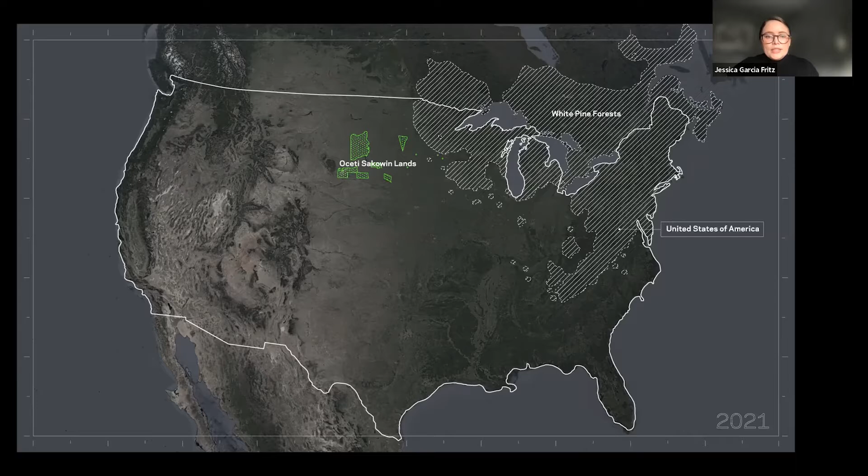At the heart of these colonial practices, which do continue today, were a series of conflicts and negotiations solidified through political agreements. And treaties comprised the original political agreements made between the United States and indigenous peoples to border land into possessed territories. From 1805 to 1868, 34 treaties were negotiated between the U.S. and Oceti-Sakowin Oyates, or nations.

Treaties became synonymous with the colonization of indigenous lands. They were also precarious and controversial, mainly because of representation and interpretation. This is why many treaties were written without full representation of a Oyate or nation present. But what was also controversial was that the language between the parties was a hindrance. English was favored, and later on, several treaties were broken.

In fact, treaty writing between the United States and indigenous nations abruptly ended with the 1871 Indian Appropriations Act. Though seemingly empty territories had already been surveyed, defined, and mostly depopulated at this time, spaces had only started to be resettled by the US. But in place of treaties, new forms of political agreements further expanded the US's control of resource extraction territories.

At the same time, the architecture and construction community in the US embarked on a structuring of agreements through organizations that governed the social, economic, and labor culture of building sites. Specification writing emerged as a practice borrowed from England, and the specification spread as an instrument of practice with the founding of the American Institute of Architects in 1857 and the subsequent professionalization of architecture in the United States.

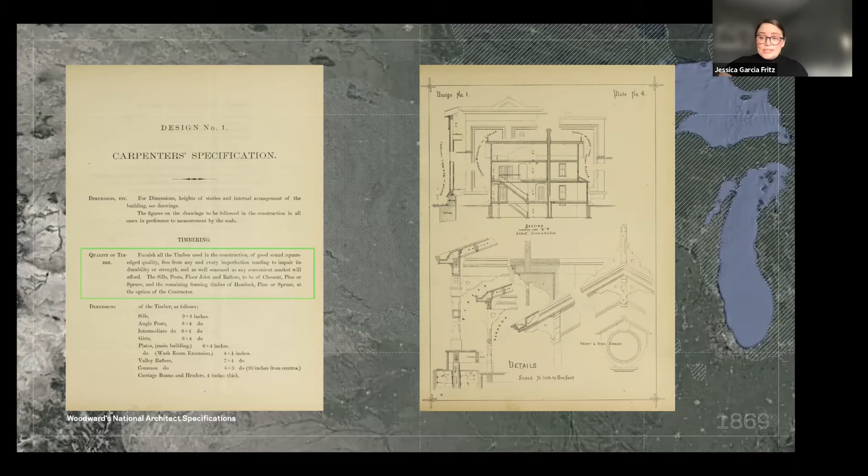Quality was interpretable, as classification systems were non-existent at this point, and the species of wood was left to the local market availability. So contractors were given agency to choose the quality and type of wood depending on their location. In spite of the generic language used for accommodating local materials, there were moments of specificity that did arise in modes of construction made possible, particularly through white pine.

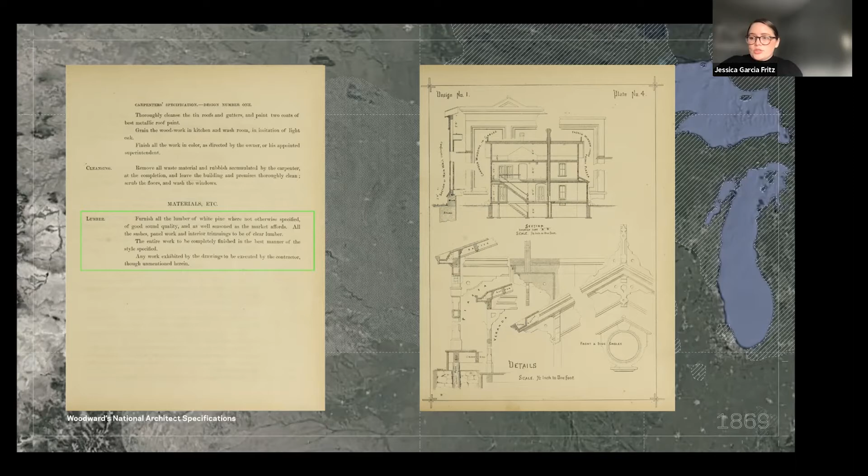So here we see that the lumber is somewhat being alluded to. It says, quote, "Furnish all the lumber of white pine where not otherwise specified," and it goes on, unquote. This material-focused directive speaks to the ubiquity of white pine as an already available construction material... treaties offered a strategy for removing indigenous peoples. Specifications aided in the resettling of indigenous lands.

U.S. legislative acts such as the 1862 Homestead Act encouraged and further enabled white settlers to claim up to 160 acres of surveyed plots if they could live and build upon them. As land was surveyed and sectioned into individual plots, U.S. citizens and immigrants flooded to the northern Great Plains to become property owners. And at this point in time, the white pine industry had its consumers.

This form of colonialism, called settler colonialism, is an ongoing form of inhabitation that seeks to replace the original population of the colonized territory with a new society of settlers. Structures like houses, which we can see here, are key to demonstrating settlement through their permanence. And pattern books with drawings and specifications like Woodward's National Architect proliferated, along with the expansion of lumber processing and shipping needed to move lumber to remote locations.

For Dakotas, Lakotas, and Nakotas, the encroachment of the white pine lumber industry reached a climax with the introduction of railroads needed to move materials. In 1868, the Fort Laramie Treaty became the final treaty written between Oceti Sakowin peoples and the United States. Before its signing, Dakotas had been pushed to western lands occupied by their Lakota and Nakota kin as a result of military conflicts that accompanied the industrial practices near the ceded lands of the first 1805 treaty we had seen earlier.

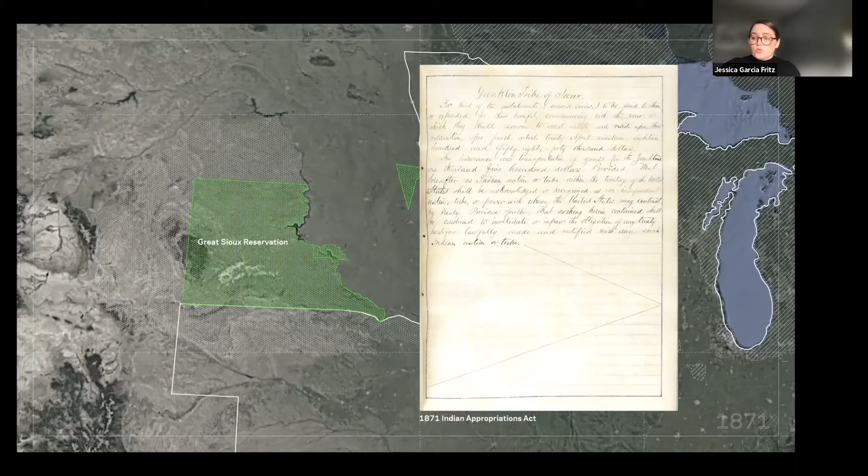With treaty making removed as a political instrument for colonizing indigenous lands, specifications helped to further delineate territories needed for resource extraction. And from the generic specifications we saw written by George E. Woodward and Edward G. Thompson for Woodward's National Architect in 1869, which was published one year after the signing of the Fort Laramie Treaty, we begin to see the evolution of white pine specification writing.

Generic specifications organized according to a housing type gave way to guides written by material producers and institutions for optimizing material selection according to lumber grades and classifications. In this way, specifications for white pine became more specific. Lumbermen's directories and reference books of the United States and Canada categorize wholesale, retail, commission dealers, and manufacturers according to locations and types of timber sought or dealt in.

So we're seeing here Rand McNally, there's a publication from 1891 and a subsequent publication from 1893. And these books offer rules for inspection, classification, measurement of lumber. They also provided state laws for lumbering. And by the end of the 19th century, Minnesota, which was an official U.S. state, dominated white pine production. So lumbering in Minnesota became synonymous with white pine.

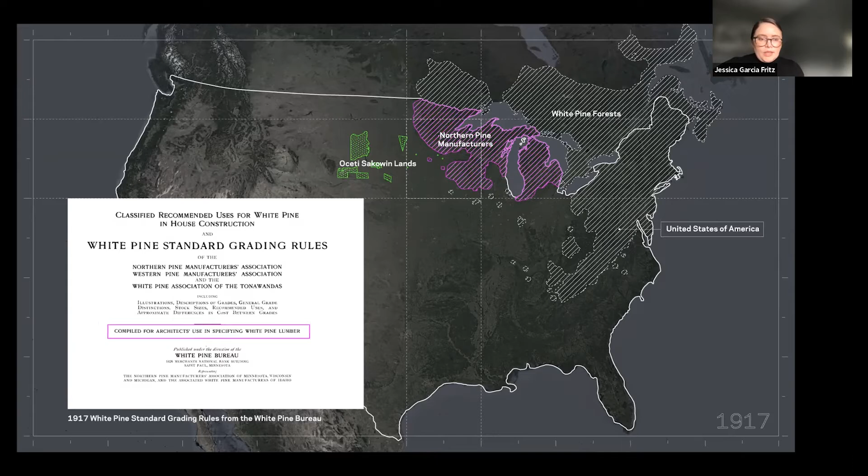But in the context of colonization, the guide that's provided here further delineated and tightened the territories in order to specify white pine elements according to class and grade. And architects were able to specify by first selecting the territory from which the lumber could be extracted. And finally, in this slide, we can see how the tightly defined territory is used in the index of the guide to point architects to the materials and elements they may select.

This is perhaps where we need to conclude. From the first white pine tree cut along the Rum River in 1818 to the material's standardized production, specifications written for white pine construction were entangled in the territorial marginalization of Oceti lands. As political agreements, treaties and specifications are both accountable for the creation of territories. Although the delineation of seemingly unsettled land is more directly linked to treaty negotiations, specifications create an initial need for territories and the raw materials they possess. And the increased selection of a certain material or a product expands territories to meet demand.

The evolution of white pine specifications from the mid-19th century to early 20th century further supports this correlation. Generic language written in pattern books such as Woodward's National Architect of 1869 indicate unknown territories for the extraction and production of lumber. In the book, directives written for houses intended to resettle newly acquired territories in the US offered substitutes in the absence of materials like white pine. But later, specifications written in the early 20th century by institutions such as the White Pine Bureau indicate a shift in precision. Size and quality of the material were meticulously considered.

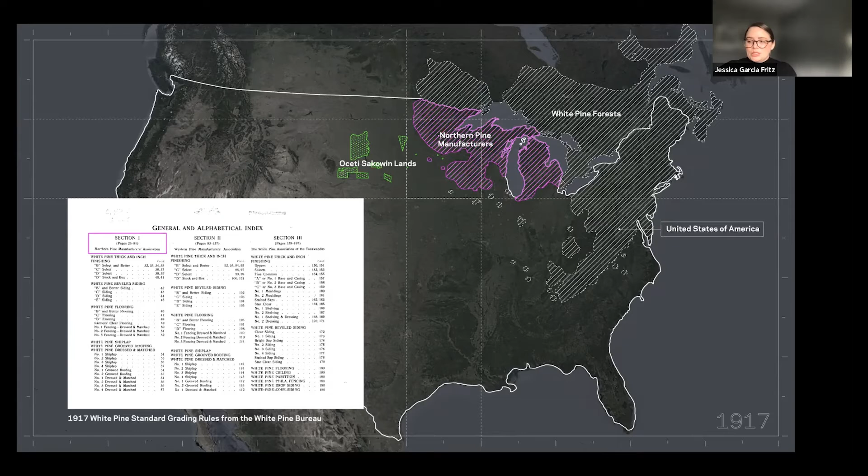As territorial borders and locations solidified, so too did points of extraction, sawmill construction for processing, railroad expansion to move the material, and military forts to defend the territories. Ultimately, precise specifications advanced specific territories. In architecture and construction, the contemporary effects of white pine extraction and its production into lumber in Oceti Sakowin lands extend beyond a simple reckoning with settler colonial practices, which, of course, are ongoing and continue. Instead, specifications must be understood as instruments for connecting seemingly benign material selection to vast territories.

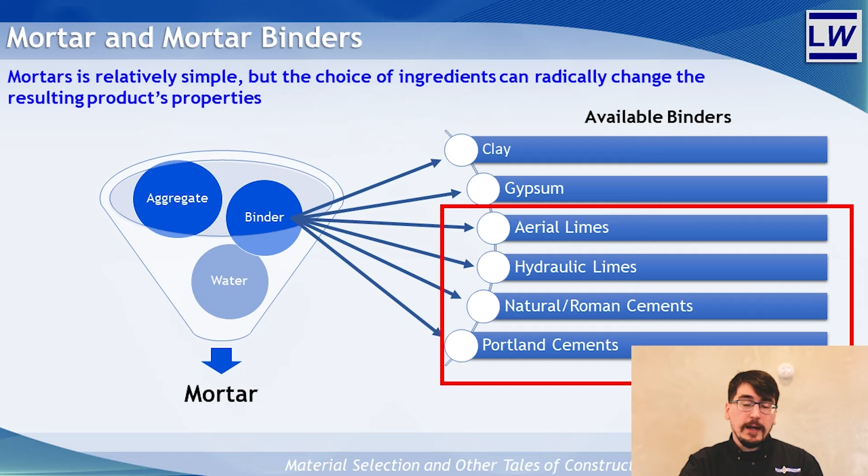For today's lecture, we're going to be focusing on the binders derived from limestone, and specifically on the hydraulic limes, as that is what my expertise is in. Now, there are a wide variety of materials made from limestone that are available on the American market today, and that can be intimidating and confusing for both amateurs and professionals alike, since often the most readily available and cheapest materials are not necessarily the most appropriate.

Now, we really don't have time in this lecture today to dive into all of these, but I provide the slide you're looking at now as a quick reference for the broad categories of binder types available on the American market. Within each of these product categories are a wide variety of materials being prepared in varying ways and sourced from various kinds of limestone. As conservation professionals become more accustomed to selecting appropriate product classes, we need to also grow increasingly critical of product production to maximize the compatibility with sensitive historic fabric.

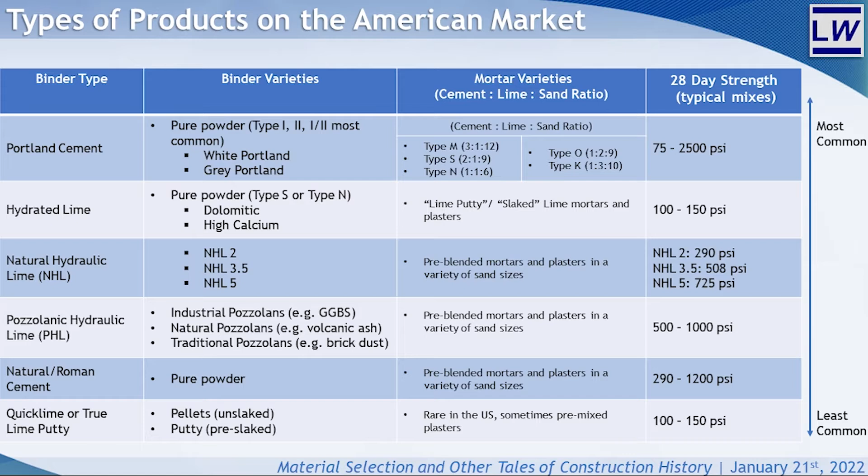Often, industry wisdom tells us to replace materials like to like. But practically, this is virtually impossible. Changes in material sourcing, production, and application mean that even if the material were made in similar proportions, there are likely significant differences in the component ingredients. Instead of like to like, we need to consider what is most likely to be compatible and sympathetic to the sensitive historic masonry around it.

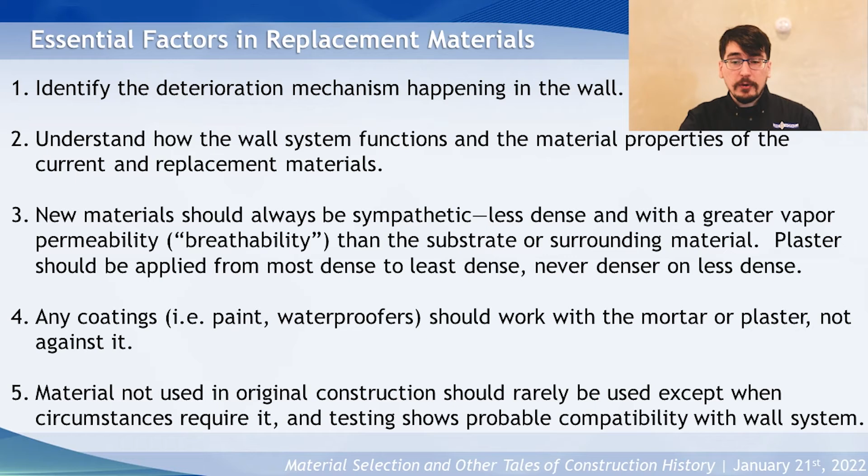The 5 factors displayed right now are my synthesis of common approach towards best practice in the field of architectural conservation. While these factors are excellent and should be carefully regarded, they fail to include consideration of the nuances within binder types. There are significant differences in all classes of limestone-derived products, such that simply saying lime should be replaced with lime, for example, is not fully sufficient. The next frontier for conservation, particularly in America, is consideration not just of the broad binder type, but also of the specific differences between types of products or brands within each broad category of binder.

What can make these differences even more confusing is that, essentially, most mortar materials are part of the same family tree, with Portlands, natural cements, and lime varieties all starting life as limestone of one type or another. Indeed, the differences between them largely lie in the specific processes of raw material selection and the procedures followed during production. Changing or failing to regulate any of these steps can result in products that behave in radically different ways, and even behave more like a totally different family of product altogether.

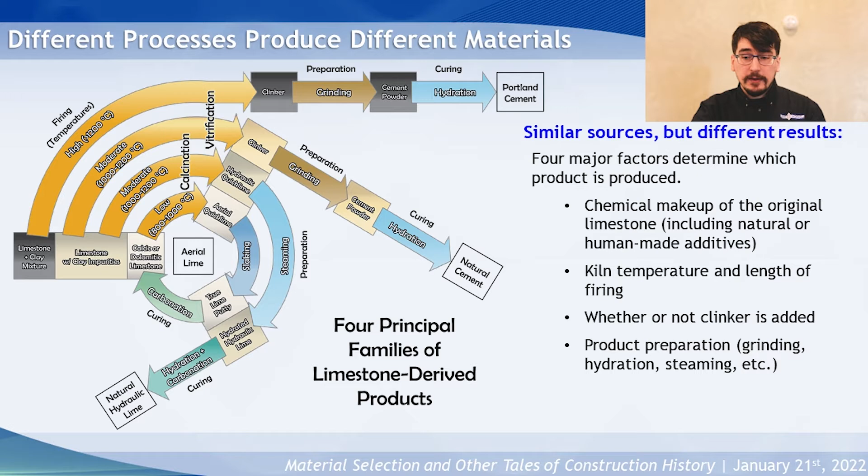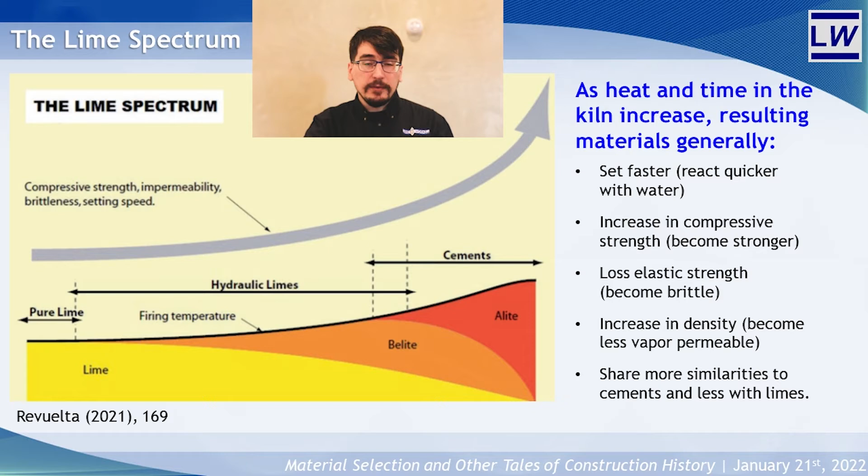Another way we might consider these relationships is in a spectrum from lime to cement. As the heat increases and is sustained, materials with added or naturally occurring silica and alumina content tend to move further from what we recognize as lime and closer to what we call cement. As you increase the heat and the time in the kiln and move further towards the cement spectrum, that results in products that are generally going to set faster, be stronger, denser, and less flexible or more brittle.

Free lime is the amount of calcium oxide available to react with silicates when hydrated, and is formed when carbon dioxide begins to be driven off from limestones above 800 degrees centigrade. Tricalcium silicate, also known as alite or C3S in cement notation, is a complex fusion of oxides containing silica and calcium, and is responsible for the formation of calcium silicate hydrate, or CSH in cement notation. This is what gives Portland its strength.

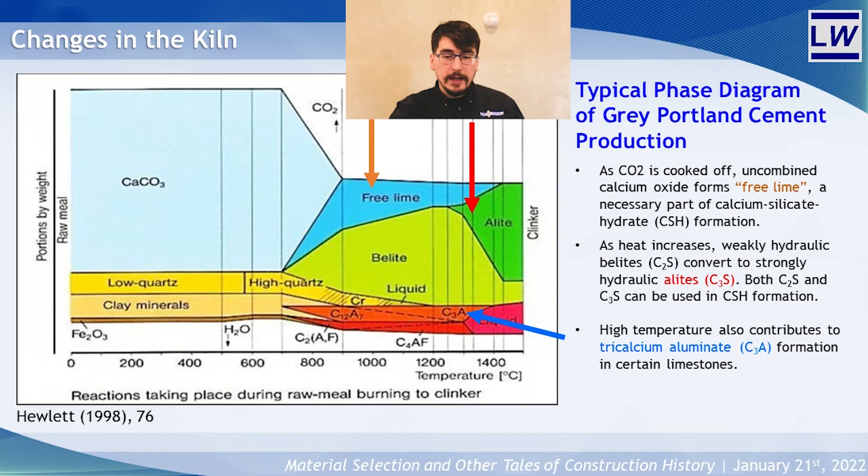C3S begins to form around 1200 degrees C, which is why Portland cement is generally kilned quite hot, at temperatures approaching 1500 degrees C. Tricalcium aluminate, or C3A, on the other hand, is a fusion of alumina and calcium oxides. While C3A does react quickly with water to produce early strength, its presence also opens material up to increased risks, and so its presence is usually minimized in modern cement production. However, because both natural and added alumina can be used to make a hydraulic lime, it's not always controlled for in the same way in lime production.

While free lime content is certainly desirable in limes of all types, there can be such a thing as too much free lime. If the kiln is not hot enough, or if there is not enough hydraulic clays naturally within the stone, not enough free lime will recombine into belite, resulting in a mortar product that is much too calcium oxide rich. When hydrated, calcium oxide expands about 90%, leaving relatively large, frequent voids in the cured product. Not only do these voids weaken the material flexurally and compressively, but they also contribute to drawing in excess moisture, which brings with it dissolved salts and sulfates, two of the most deleterious substances to masonry.

In mixes that are combined with cements or have a great deal of alite, the free lime has no place to go and is jettisoned from the curing material, forming aesthetically unpleasing calcite streaks often known as lime run. In materials rich in hydraulic material, failure to control the temperature of the kiln by burning too hot or for too long results in mixes rich in alite. Alite, which forms tight needle-like networks, increases the capillarity of the material, while driving up its density and down its vapor permeability. So while it takes longer to get wet, when it does get wet, the water and any dissolved materials in it are drawn deeper into the material, where they are held on to much longer, contributing to deterioration from a variety of sources, most commonly salt crystallization, freeze-thaw damage, and gypsum incrustation.

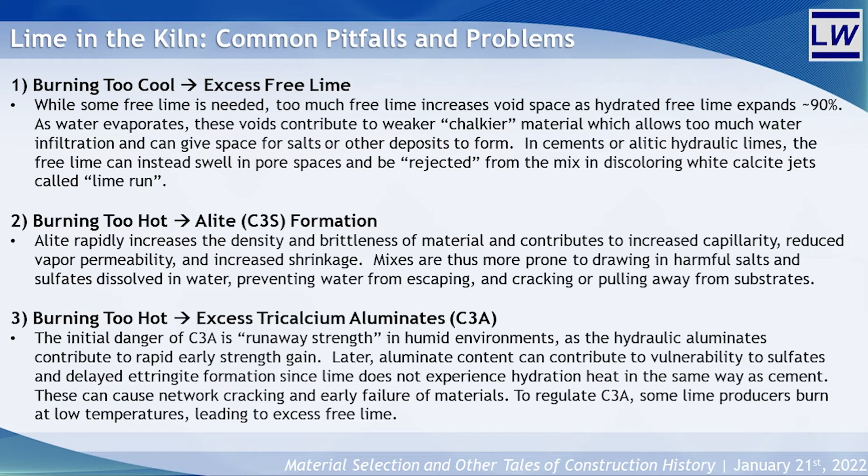Less commonly, but still a threat, high C3A limes can swell in the presence of sulfates due to delayed ettringite formation, leading to cracking and weakening of the material. To prevent the formation of excess C3A, producers may undercook their lime, which can result in excess free lime, leading us back to the problem discussed in point number 1. Now, on some level, these kinds of minute differences can seem unimportant, or like we academics are splitting hairs. However, in certain environments, they really can matter in a practical way. Indeed, in historic preservation, these kinds of sensitive materials are very common.

For example, in soft masonry, such as low-fired or handmade brick, and certain types of soft stone like brownstone, a small difference in density can be the difference between a good water-regulating system that protects the masonry or a water-trapping system that leads to deleterious results. In these places, using a product high in C3A or in alites could literally be the difference between preservation or further deterioration. Likewise, in urban environments where de-icing salts and sulfates from vehicles and industries are common, a material high in C3A, in alites, or in free lime will face deleterious conditions from a variety of conditions, including gypsum incrustation, salt crystallization, or possible delayed ettringite formation, just to name a few.

Now, we could probably have a lecture on any one of these contexts and anything mentioned in this slide. And there are certainly more things that I'm not listing. But suffice to say, it really isn't quite as simple as the old mantra of remove Portland and replace it with lime, as is becoming quite common in historic masonry in the US right now.

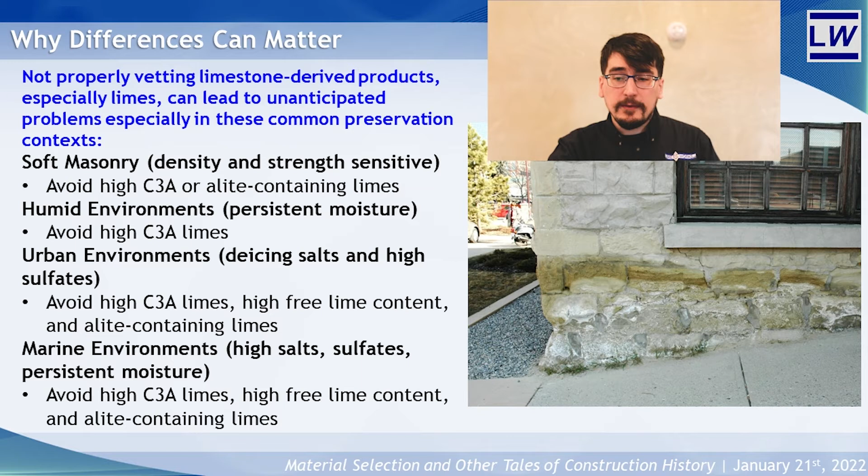Modern Portland cement production is highly studied and regulated, and as a result, most brands of Portland cement are reliably interchangeable, apart from minor differences in things like color. However, in hydraulic lime production, there is not yet quite the kind of wide, tight industry regulation that produces consistent and reliable products across brands.

This is partly because, unlike most Portland cement, hydraulic lime brands are tightly tied to their originating quarry, and tighter regulations might completely change the classification of certain companies' products, or even eliminate some quarries entirely from calling their product a hydraulic lime. This means the specifier must be savvy in what questions they ask and what kind of products they seek, as quarry mineralogy—specifically the amount and nature of silica and alumina clays, and the calcium carbonate in the stone—can very predictably result in certain quirks in some brands of hydraulic lime.

When a brand is not associated with a quarry, this can make things even more difficult, because you may be dealing with a repackaged product from an unknown producer or a manufactured product that will require extra scrutiny. Because of how tightly tied to quarries most brands are, you can usually predict what kind of product they are producing just by knowing a little about the source limestone. Thus, if a quarry is known to produce high alumina limestone, but the manufacturer is not disclosing high alumina content, you can probably guess that there may be more to the story that requires investigation.

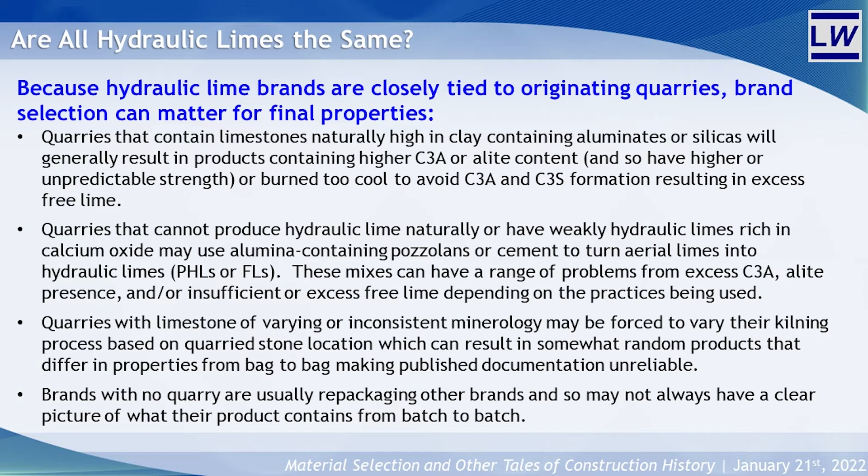In general, honest products are going to provide honest data, while companies with inconsistent products or no testing will not be able to produce numbers over time and may not, as a result, have reliable products. Now, that doesn't mean those products can't be used, but it does put an extra onus on us as specifiers to do extra testing. Now, just because one kind of lime is inappropriate in one context or application doesn't mean that the company is producing a bad product or that their limes are inappropriate in all situations.

For example, a company that consistently produces high alumina lime that is both well disclosed and well understood may not be appropriate for soft masonry in humid environments due to runaway strength, but it could be perfectly suited for denser masonry in more temperate climates. Likewise, a lime with a higher free lime content might be risky in an urban setting, but it could be perfectly okay to use on soft masonry in very dry settings like the desert Southwest.

The key, though, is that we cannot just assume that all limes are interchangeable. We must do our diligence.

Most specifiers start with mortar analysis, but while mortar analysis can tell us much about the current or original mortars, it leaves key questions unanswered. Specifically, mortar analysis cannot tell us about the original density or compressive strength of the mortar, and there is no reliable way to determine these properties, as mortar sections rarely have enough volume or a consistent enough shape to measure. And by the time we are testing in situ mortars, the mortar is also at the end of its service life, and the host masonry may have been modified due to weathering, meaning that we're not getting an accurate picture of what should be replaced.

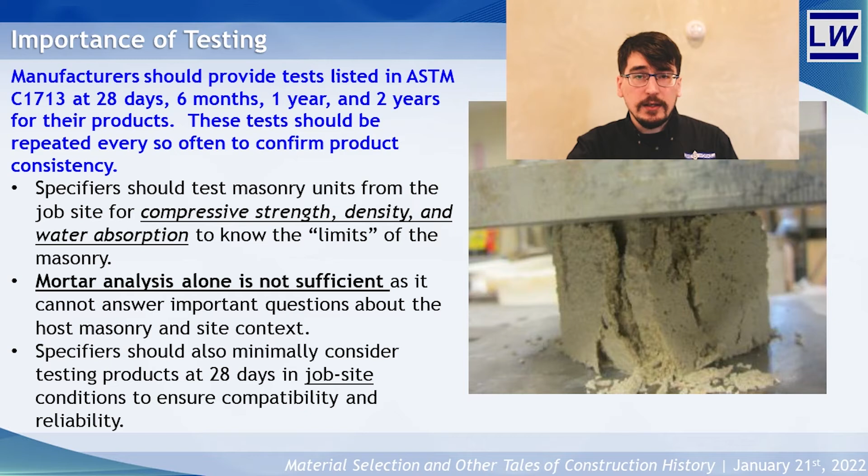On the specifier end, it can be prudent to do these tests in job site conditions to at least 28 days, to confirm that the manufacturer's numbers are reliable or are within a reasonable margin. If project site testing cannot show a product to be reliable, then you may want to consider using a different product.

In conclusion, the topics we are exploring today are quite detailed, and we could probably fill a whole semester of lectures. There are, of course, factors beyond those mentioned here that are also important to consider in product selection. In this admittedly shallow dive, I hope that I have at least started the process of giving you the kinds of variations that exist in the market and the kinds of questions you should be asking when planning a project using limestone-derived materials.

Very few manufacturers are making bad products, so this should not be seen as an endorsement of or condemnation of any specific product or brand. Rather, it should place the duty on us as users to increase our awareness of what exists and the potential pitfalls we might fall into if we aren't careful in product selection, as it really is not as simple as replacing like to like. Mineralogy of source limestone, kiln procedures, and production techniques can all matter in the final product. These differences can matter more or less based on the individual context, and there is no one-size-fits-all limestone product, no matter what anybody tries to tell you.

As such, specifiers in particular should take care to obtain the right data on their products and their projects to ensure maximum compatibility and increase the chance that intervention will be non-damaging and therefore successful on the historic fabric. In other words, materials should be shown to fit the purpose for which they are intended.

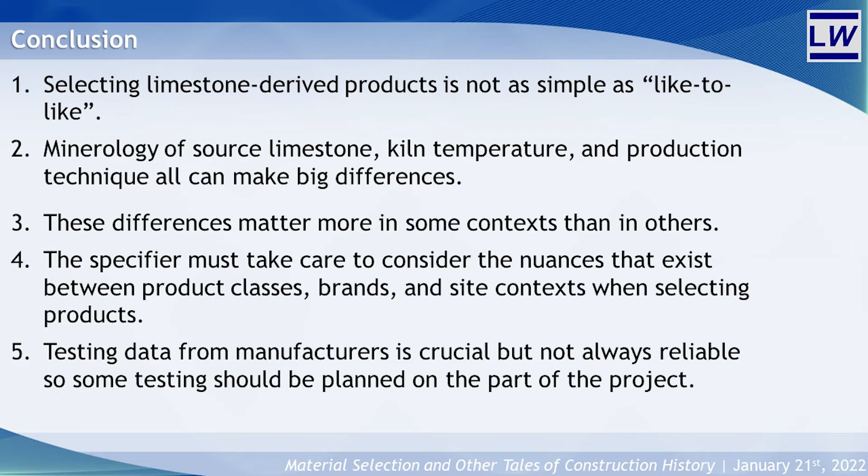Hello everyone. Today we're going to be presenting some interesting findings during research we performed during the restoration of Richard Upjohn's Trinity Church in New York. My name is Assya Plavskina. I used to work as a conservator for Building Conservation Associates, who's in charge of the restoration at Trinity Church. I was project manager for the design of this project and part of the restoration work. I've since moved on to Prospect Park Alliance in Brooklyn, at which point Alex took over as the project manager.

Hi, I'm Alex Ray, conservator with Building Conservation Associates. I started off working on the archival research that we're going to talk about today. And as Assya mentioned, I'm currently in the role of project manager. I also want to mention our co-contributor, Raymond Pepi, principal in charge at BCA, who's been involved in the project from the beginning. But today, Assya and I will take you through this presentation of selected findings.

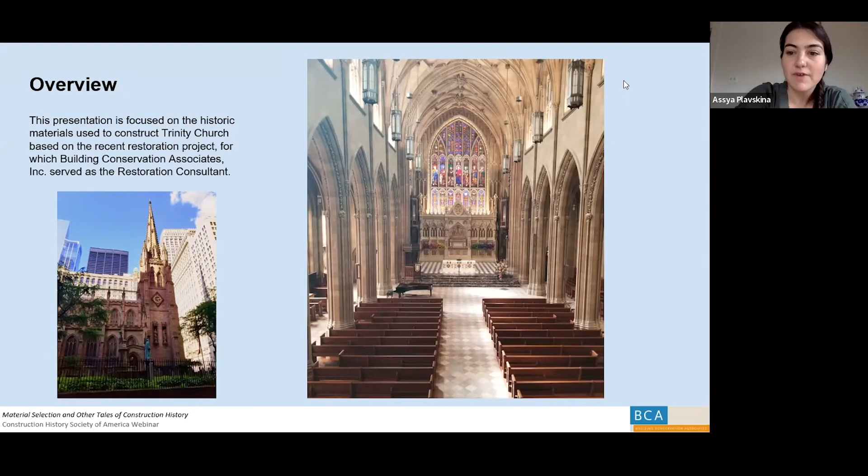Building Conservation Associates recently completed a restoration campaign at the interior of Trinity Church on Wall Street in New York. As part of the design of the project, we wanted to perform a wide breadth of research, archival, materials research, and in situ conditions inspections to make sure that we really understood the construction of the church and the choices that were made as part of the design intent. In this presentation, we'll present some of those select findings and the implications these findings had on the restoration.

To start with a brief overview of the history of Trinity Church, beginning with the establishment of its parish in 1697 as part of the Episcopal Diocese of New York. The current Trinity Church is the third church building to be built on the site, and it was constructed between 1839 to 46, according to the design of architect Richard Upjohn. Trinity Church is considered one of the earliest examples of Gothic Revival architecture in the United States.

I also want to point out a later addition to the original building, the Reredos, designed by Frederick Clark Withers in 1877.

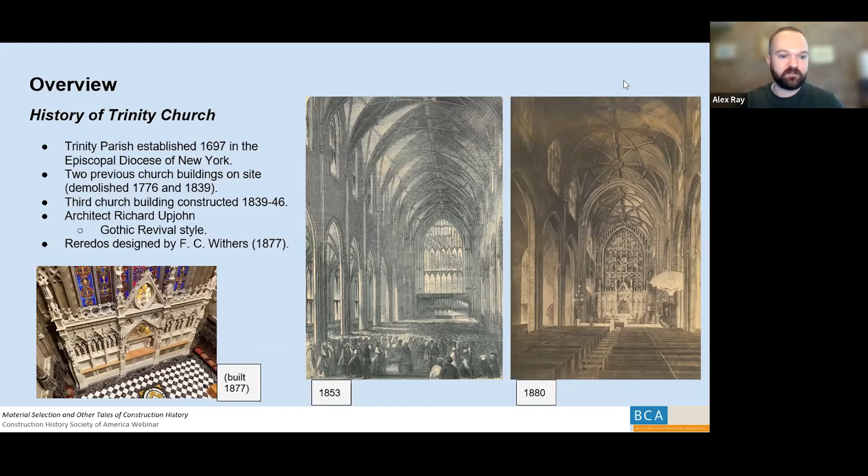So an important aspect of the original design that we're going to discuss today is the use of decorative plaster to imitate masonry construction. This is a feature that was actually reinstated as part of the recently completed restoration project. On the left is a view of the nave ceiling.

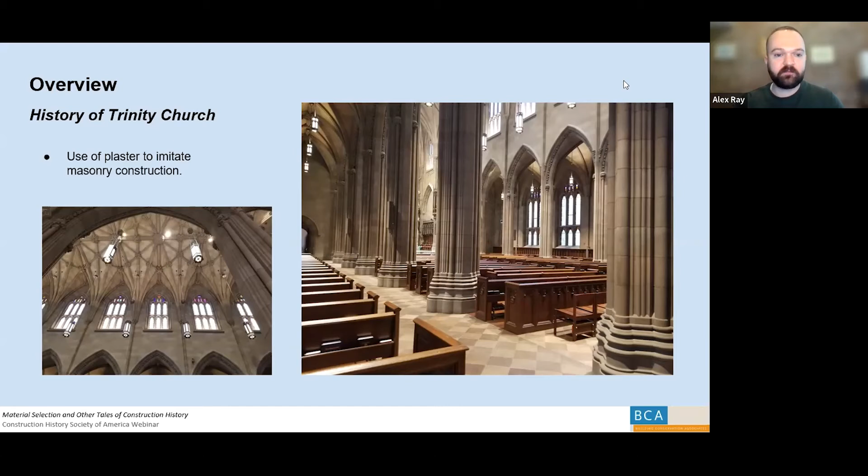You can see the decorative differentiated color blocking scheme, a paint scheme used to simulate the appearance of coursed masonry units. On the right, you can see the true stone columns in context with the painted walls. The columns are a New Jersey sandstone.

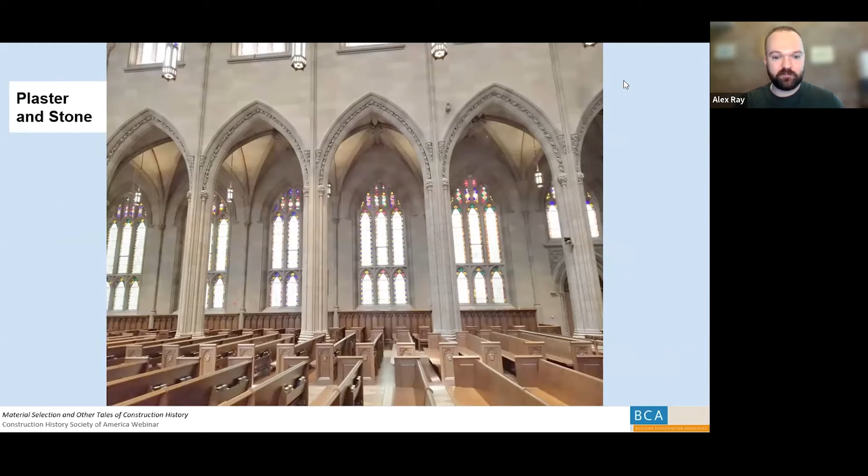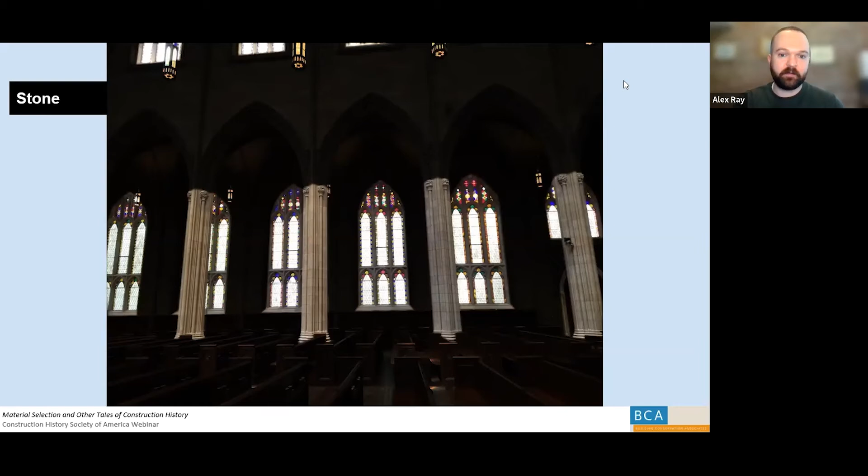Another view of the overall composition, looking across the center aisle. Everything you see in this image, with the exception of the wood pews, is either plaster or stone. In fact, the stone is limited to those structural stone columns with the carved colonnette capitals, as well as the window tracery behind, which plays a load-bearing role in the exterior wall assembly.

To give a brief overview of the restoration project, the goals were, in no particular order: restoration of deteriorated materials at the building, which is the subject of this presentation; treatment of previous alterations that had occurred over time at the church; as well as a comprehensive upgrade of building systems to allow for continued use of the building well into the future.

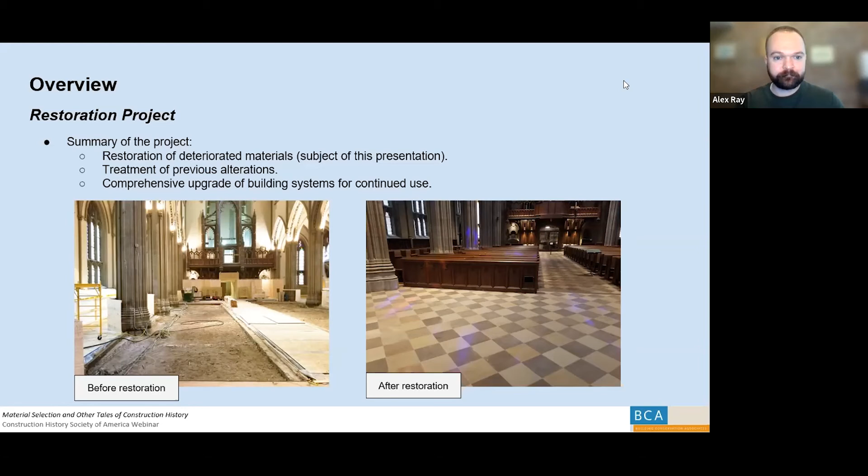We're going to share today, as Assya mentioned, two parallel tracks of research and investigation undertaken during the design of this project. Assya will share findings from the materials research that help us understand the conditions as they exist today. And I'm going to speak first about the archival research, which we performed to identify the construction chronology of the building and, as much as we could, reveal the original design intent.

So we consulted, among other sources, the original architectural drawings, a number of contracts, account books, meeting minutes, correspondence dating from the period of construction that was housed at Trinity's own internal archives, and a variety of other sources to accumulate images for reference and other publications.

But I want to specifically mention the Trinity Wall Street archives were a particularly valuable source of information. As you can imagine, the church's own records of the construction of their building were quite comprehensive, and Trinity had established its practice as a record-keeping institution for over 150 years, beginning with the establishment of their parish before this building was built. So they certainly had an impressive infrastructure in place for keeping records about their activities.

And in particular, of special use to us were the meeting minutes of the building committee, which, separately from the business dealings of the parish, provided a weekly construction update recorded in real time — a quite unusual level of detail to have on one building. That's quite valuable for us.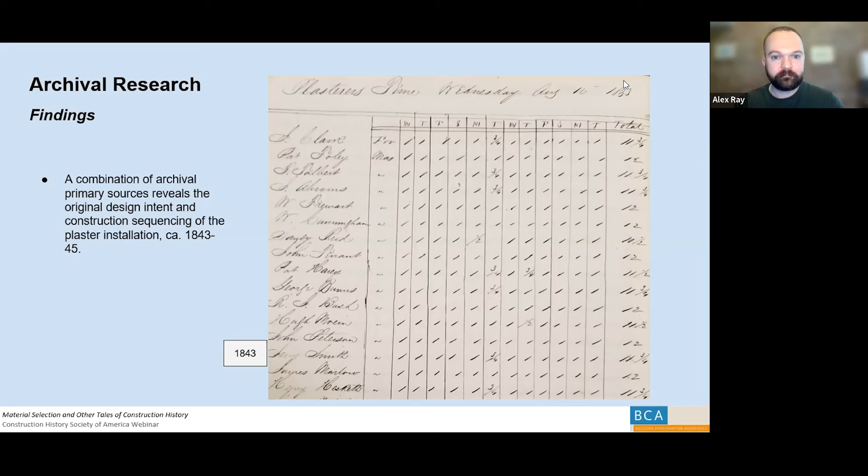The next item I'll share is a letter dated from later in 1844, February 5th, from Richard Upjohn, written to the building committee. I should also point out that the building committee was tasked with overseeing the construction of the church. In fact, all the contracts held with the different trades working on the building were held and administered by this committee, as was the employment of their architect, Richard Upjohn.

So Richard Upjohn is writing in this letter in February of 1844 to the building committee, basically recommending that as the building is approaching completion, he's recommending to postpone the interior finishing, as he says, and to do it all except the very last touches until after the exterior walls and tower are established in their full load-bearing configuration, then apply the coloring and finish to the entire scene.

So a recommended pause in the work, and that's sort of the first event in a series that I'm going to sort of outline here. But also Assya will speak in more detail about what we learned through the materials investigation, in detail about what these finishing processes may have consisted of in terms of the materials.

And I should also add that we do get confirmation in March of 1844 from a routine sort of construction status update that in fact by that time, early 1844, a significant portion of the plaster work was complete and essentially awaiting these finishing touches that Upjohn describes.

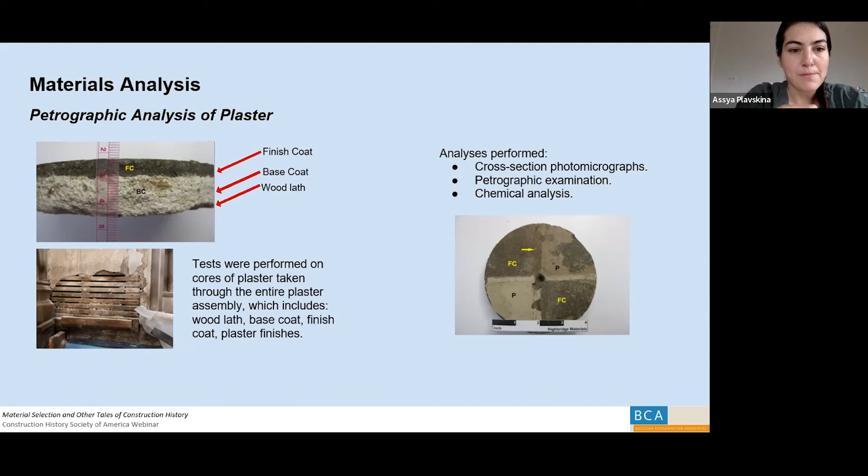For those of you who don't know plaster stratigraphy, the section that you see here is a pretty typical plaster installation, where a base coat, which in the top left photograph you see as the whitish gray, is applied over wood lath. And then above that is a finish coat, which you see as the reddish brown. And then above that are our finish layers. And we performed the analysis that you see on the right.

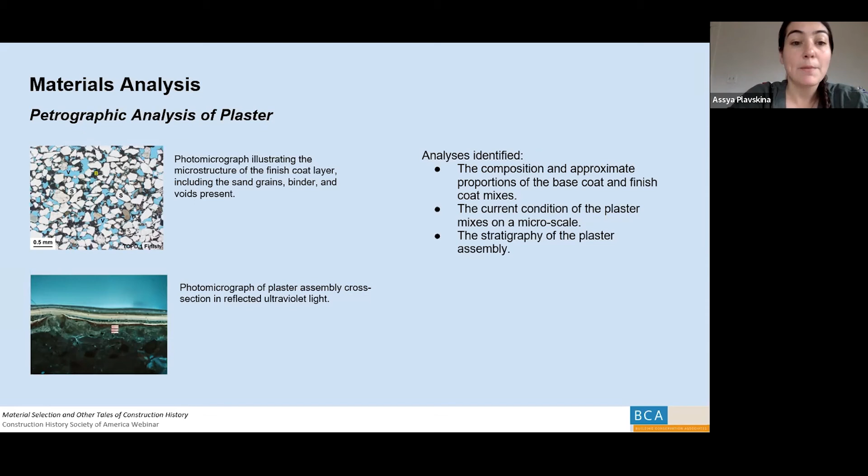And the goal of these analyses was to understand the composition and proportions of both the base coat and finish coat, hoping that that information would provide us some idea of the construction timeline, and also understanding the composition would allow us to understand the current condition of the plaster on a microscale level.

We also took a look at the mortar. Now the interior and exterior of Trinity Church have been repointed several times throughout its lifetime, but we were really hoping to find some of the original pointing mortar, and we were able to do so. We found original pointing mortar at the window tracery. Holistically, it's mostly been repointed, but there was some original pointing mortar remaining. Most of the columns had the original pointing mortar.

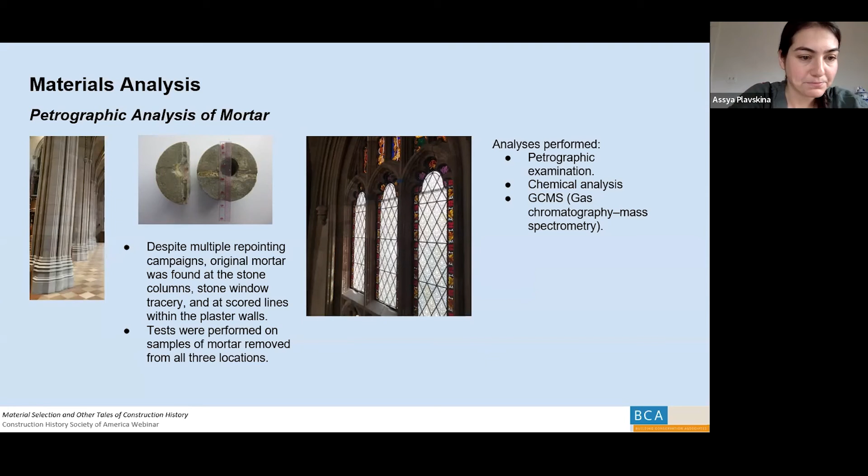And then we were also surprised to learn that we found pointing mortar within the scored plaster joints of the plaster at the walls. Oftentimes in faux masonry plaster finishes, the joints are painted in with a finish, but this time there actually was true mortar in there. And the goal of the analysis was similar to plaster, to understand the composition and approximate proportions of the mix. And then this would lead us into identifying the condition of the current mortar and to better understand a replacement mix for where it would need to be replaced.

And the goal of our finishes analysis was to understand the composition and also try to understand what the intended appearance of that original finish was, and then to find whether it could be conserved or replaced with a similar finish.

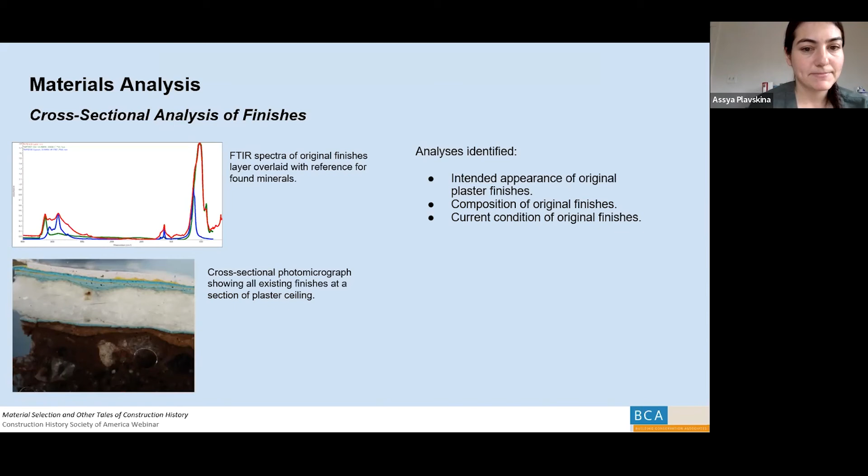So let's talk about some of the findings of our plaster analysis. What you see here are photomicrographs, which show the composition of the finish coat at the bottom left, and the base coat at the top left. What we found about the base coat was that it was a mixture of gypsum plaster, hydrated lime, sand, and animal hair. And the gypsum was actually the predominant binder in this mix, and I'll speak more to that later.

The finish coat was a mixture of lime, red pigment, and sand. The sand was actually crushed sand from the same stone that was used to build the columns, and that was made to mimic that stone appearance.

The bottom left photograph, that photomicrograph, that is an epoxy impregnated sample, which means the epoxy is impregnated into the plaster sample, and the epoxy is blue. So everywhere where you see blue coming up in the photograph, that's an area of a void that's been filled by epoxy, and you can see there's quite a bit of voids.

We found that the finish coat plaster mix was really highly sanded, which meant there was a lot of these voids, and that caused a sort of crumbly, fine, fragile plaster. And we did unfortunately see that in situ while performing a conditions assessment.

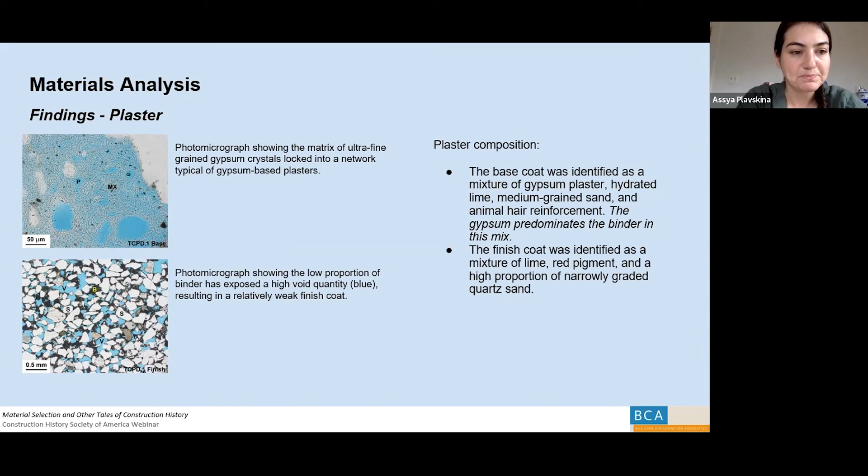So if we can talk about gypsum as a material for plaster mixes, obviously gypsum has been used for plaster for millennia, but in the United States and in the Northeast specifically, where Trinity Church is located, in the mid-19th century, it was not a common material for wall plaster. We know that gypsum has been quarried for agricultural use since the early 19th century in New York, and you see there a quarry in that photograph.

And around the mid-19th century, when this gypsum plaster was installed at Trinity for the wall plaster, really gypsum was mostly used as a plaster of Paris. So for decorative ornamental plaster or figurines it was very common. But the first gypsum plaster production did not begin in New York until 1892. And when it began in 1892, it quickly became the predominant wall plaster binder.

However, to us and other researchers that we've spoken to, this 1840s installation is the first known installation of a gypsum heavy plaster in New York and in the United States.

I do want to note that we tried to sort of track down where this could have come from. As Alex pointed out in the research, we have contract documents and receipts. So we know that there was a company out of Newark that was a quarry processing plant for gypsum. And we were hoping to find them potentially being a source for the gypsum used in the wall plaster, and where the decision to use the gypsum heavy plaster came from, but we couldn't track down the details.

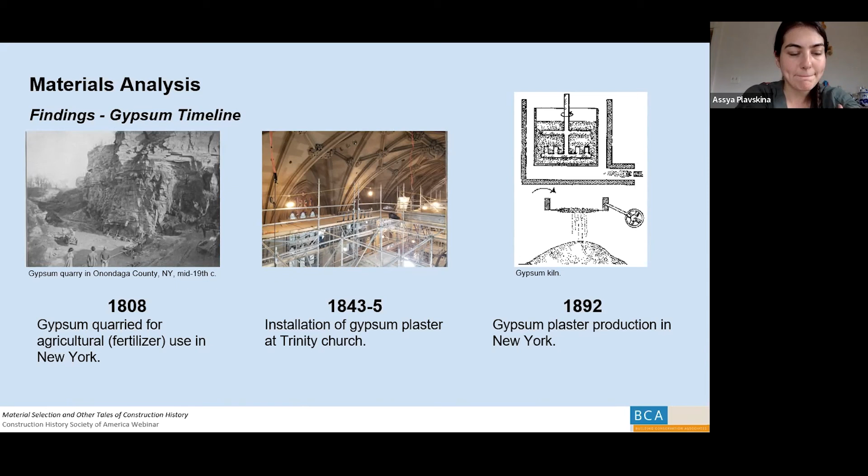And what we're finding in our analysis actually is that the first layer had cured before the second layer was applied. So it was too long of a time period. And that caused, in some places, but not all, a weak bond between the two layers. And so this outermost layer of plaster finish coat was actually separating from the bottom layer of the finish coat.

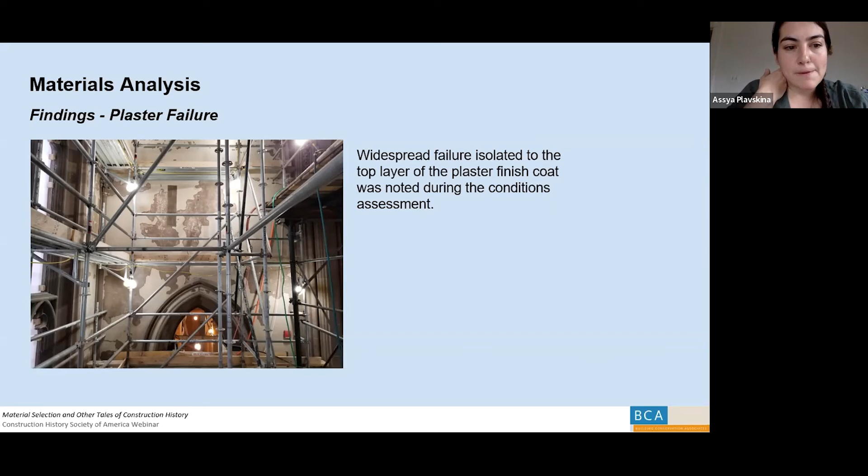One of the challenges that we had during restoration was finding a way to remove that failing layer and remove any failing finishes without damaging the well-bonded surface. Oftentimes the separating layers were caught under layers of paint, acrylic paint, that were sort of hiding what was really going on. So we had to find a way to be conservative about this.

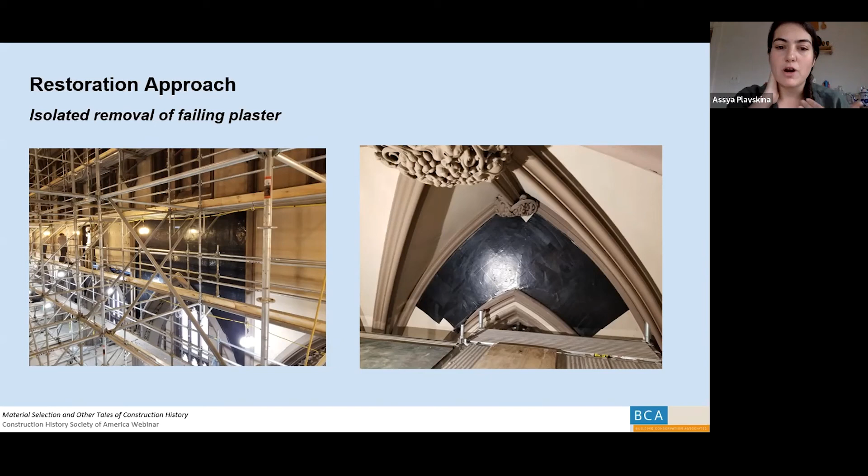Large rolls of duct tape were applied to all of the plaster surfaces of the wall, and then when they were removed, only what was failing removed off the wall, and what was well bonded, well adhered, remained on the wall. You can see that in these photographs on the left, you see that's a bit of rolled up duct tape with some of the failed finish layers attached to it.

There on the wall, you see some removed finish layers, that's failed paint, overpaint, and that's exposed that sort of original finish. And then when you see towards the left of the photograph, you see some islands of what appears to be plaster. That is where that failed finish coat actually came off.

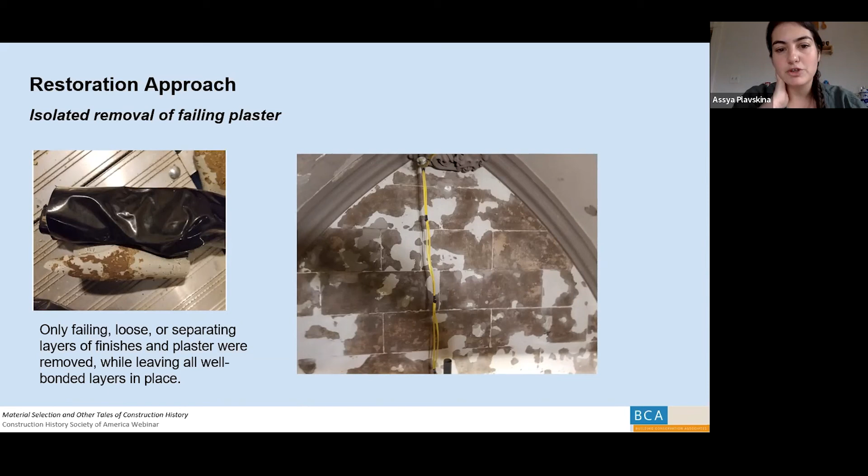And I know this appears a little extreme, but I do want to assure you that this really was the most conservative approach. We tried to salvage what we could, but all of the layers that were removed were layers that were already in the process of coming off anyway. And so we just basically sped that up a little bit.

In the mortar, we actually also found something very interesting regarding the timeline of installation. We found that the composition of the original pointing mortar was crushed chalk whiting and red pigment in fatty acid soap medium, and there was no aggregate present in this mortar. This was very unlike typical 19th century mortars.

When we looked at the mortar composition of the mortar that was installed in the scored plaster joints, we were very surprised to find that it was the same mortar composition as that of the tracery joints, which were load bearing, and the column joints. It was very interesting they chose to install true mortar into those plaster scored joints, which is really a finish layer.

What's particularly interesting is that in the mid-19th century, there was a mix of very, very similar proportions that was used in construction, but it was used as a weatherproofing material for window glazing putty. Mortars of similar composition were found in the United States. We have seen examples of it, but not until the 1870s or 1880s in Romanesque revival buildings. This is definitely the first example that we've seen and other experts have seen of this particular mortar mix being used within joints.

The appearance of this mortar, due to the lack of aggregate and the binders, is sort of matte lustered, very, very smooth, obviously, because there's no aggregate in it. It's in pretty good condition as a result. We did find that where it remained, it was in good condition.

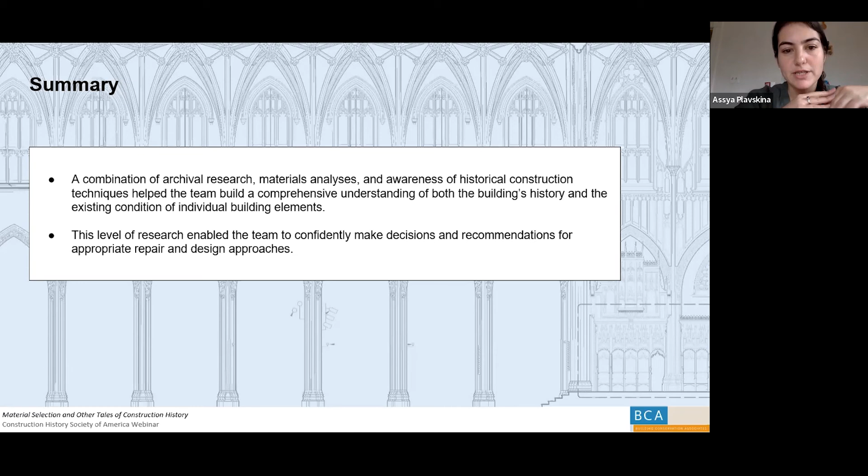So in summary, this combination of archival research, materials analysis, and knowledge and awareness of typical construction techniques of the time really helped us to build a more comprehensive understanding, a comprehensive story of what was going on within the building's construction history, and all of the existing conditions, really explained what we were seeing on site. And this level of research and the story that we were able to build helped us to make very confident decisions and recommendations for appropriate repairs and design approaches during the restoration.